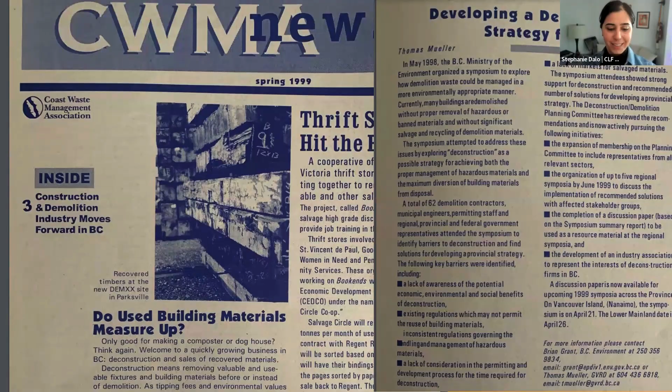Thanks, Sheila. Thanks, Natalie. And thanks to everyone who made the effort to be a part of today's presentation and discussion. Okay, so today we're here to talk about the intersection of embodied carbon and circularity, or in other words, where embodied carbon meets circularity.

Before I get started, I want to take a moment to acknowledge that I live, work, and play on the unceded and ancestral territories of the Squamish, Tsleil-Waututh, and Musqueam First Nations community, who have been stewards of these lands since time immemorial. One thing I want to add is that a lot of these concepts I think really align well with the 7 generations principles and that abundance mindset. I think that we can learn a lot from the Indigenous and First Nations communities.

These themes really mean that we have to shift away from thinking about systems change and social innovation paradigms through a scarcity, urgency, and efficiency mindset, and move toward an abundance and generosity mindset. So I just want to take a moment to say that.

Okay, so for today, I'm going to give you an introduction to the current climate around embodied carbon and circularity principles in the built environment. Then I'm going to break it into three different parts. The first being where embodied carbon and circularity meet. Part two is net zero by 2050, creating the most impact with 25 years to go. And the third being rethinking carbon offsets—a little bit of fun, a short section just to think outside the box.

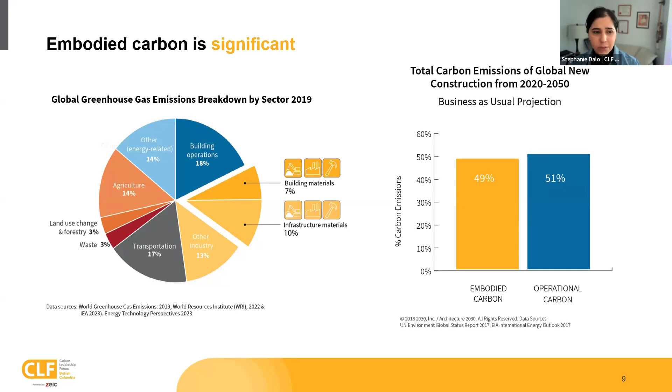Unlike operational carbon emissions, which can be reduced over time with building energy upgrades and the use of renewable energies, embodied carbon emissions are locked in place as soon as a building is built. That means that in the near term, reducing embodied carbon is critical.

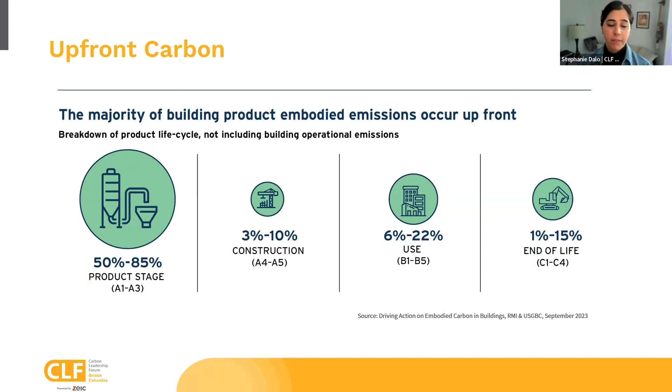Further breaking that down, looking at the whole building life cycle, upfront carbon is emitted before a building is operational and can significantly outweigh operational carbon. The majority of a building's total embodied carbon is released upfront at the product stage at the beginning of the building's life, that's A1 to A3 and including A4 and A5. I'll get more into some of the gaps there later on.

Some tools and strategies to reduce embodied carbon broken out in a report, Embodied Carbon 101, released by the Carbon Leadership Forum last year, include build less and reusing more, designing lighter and smarter, using low carbon alternatives, and procuring lower carbon products. We've been developing clear strategies that can help people better understand the interventions they can make.

Now let's talk about waste. In Canada, the built environment is one of the largest consumers of raw materials and energy, and is also the largest contributor to the waste stream by weight.

3.4 million tons of construction material are sent to landfill annually, representing an estimated 1.8 million metric tons of embodied carbon. I know people like to compare things to vehicles and driving, so I looked into that, and that is the equivalent of over 7.3 billion kilometers driven by an average gasoline-powered passenger vehicle, using the EPA calculator.

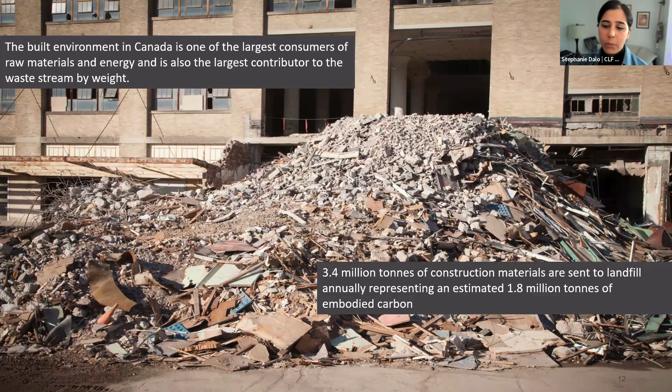Demolition is still heavily practiced because these buildings were not designed for disassembly, making demolition the quicker, more simple, and more convenient option. But typical mechanical demolition is dirty, wasteful, costly, and poses health risks. So we haven't quite figured out how to enable, encourage, and support deconstruction and reuse of materials so that we can drive down product and upfront carbon emissions and reduce waste.

Something I've noticed over the last few years, especially in the last year in conversation, is that it's becoming clear the term circular economy is perceived as just more jargon in the sustainability realm. I want to help people better understand what it means.

A circular economy is one that is restorative by design. It aims to keep products, components, and materials at their highest utility and value at all times. It's a global economic model that decouples economic growth and development from the consumption of finite resources, and focuses on effective design and use of materials to optimize their flow and maintain or increase the stocks of technical and natural resources. A circular economy would provide new opportunities for innovation across fields and establish a framework and building blocks for a resilient system that will work in the longer term.

So what does that look like in the built environment? I'm sure many of you have seen this inverted triangle. What it's meant to do is persuade people to implement strategies that have the highest and most meaningful impact. Sometimes I think we've really started from the bottom, minimizing waste, but this challenges us to think of it from the top down, with these strategies of building nothing, building less, building clever, building efficiently, and then minimizing waste.

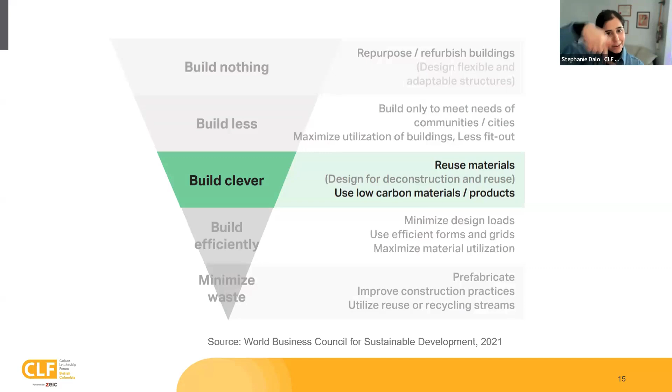The situation we're here with right now is that construction and demolition, as I mentioned, is making up a significant portion of the waste in landfill, roughly about a third of the waste in landfill. And of that waste, it's seen that roughly 37% of that is valuable lumber. That's here in Metro Vancouver, I should say.

A standard home weighs close to 50 tons, and far too often usable resources are discarded at the expense of customers. I know many people who've seen demolition sites and just want to cry. I'm one of those people.

I wanted to show the equivalent of that 43 tons of carbon dioxide to driving an average gasoline powered vehicle over 177,000 kilometers. That's like driving from Vancouver to Ottawa 40 times, which would be 72 days of driving. No thanks, right? That's a lot of emissions.

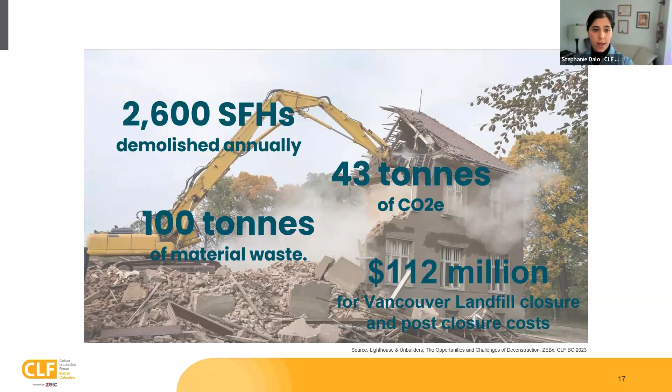That's just looking at 2,600 single family homes that are demolished, producing 100 tons of material waste, which could cost 112 million dollars for Vancouver landfill closures and post-closure costs.

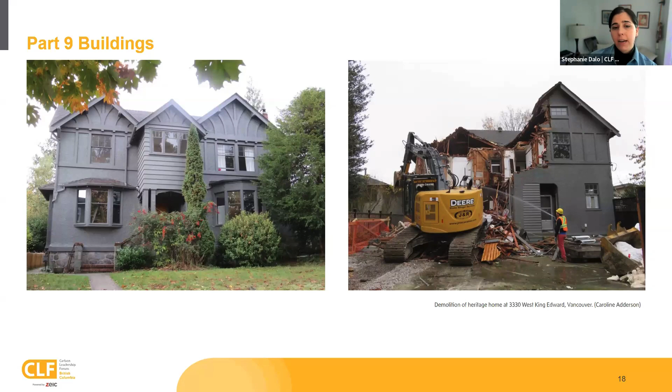We've seen, from an article in 2015, that this heritage house ended up being demolished. Fortunately, since then, we're starting to see the introduction of some deconstruction bylaws.

The City of Vancouver has the Green Demolition Bylaw, where deconstruction requirements apply if you demolish a heritage-listed house, or a house built before 1910. Since then, the District of North Vancouver has released a bylaw requiring deconstruction of homes before 1950, and the City of Victoria released a bylaw requiring deconstruction of houses built before 1960.

There's more detail to each of these bylaws that we can't get into, but they also include salvage, recycling, and diversion rates. It's great to see the introduction of these policies requiring deconstruction.

Although I would hope we can see more of this, and that requirements don't only prioritize homes built 65 years or older, because a lot of newer homes built since then tend to come down sooner when people want larger renovations or retrofits, sometimes lumped in as a big renovation. So what more can we be doing to optimize the reuse of building materials?

Now, when it comes to policy around embodied carbon, the City of Vancouver has been putting a lot of effort into developing embodied carbon requirements being introduced in the Vancouver Building Bylaw 2025 updates. This proposes that all new Part 3 buildings will be required to model and report the whole building life cycle assessment and demonstrate a 10% reduction as specified in the embodied carbon guidelines.

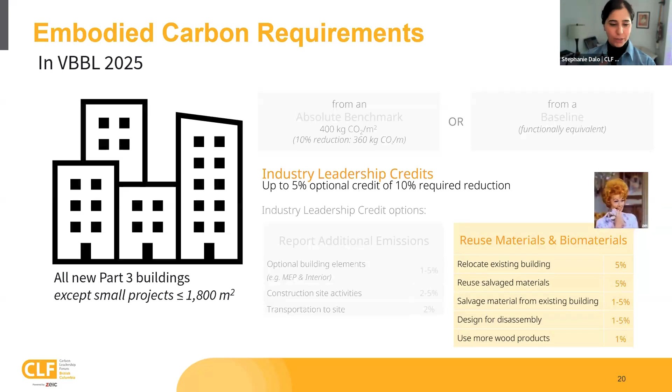So let's get into part one now, where embodied carbon meets circularity. I'm going to give an introduction, or a high-level overview, of these circular strategies, starting with deconstruction and material reuse.

Reuse of existing buildings and/or materials can reduce emissions by as much as 75% compared to demolishing and building new, according to an RMI report on driving action on embodied carbon in buildings. While it might not always be possible to reuse an existing building or a substantial amount of reused materials, the possibility is often never explored early enough in a project cycle. Taking time to establish whether building and/or material reuse is viable can have substantial embodied carbon and cost payback.

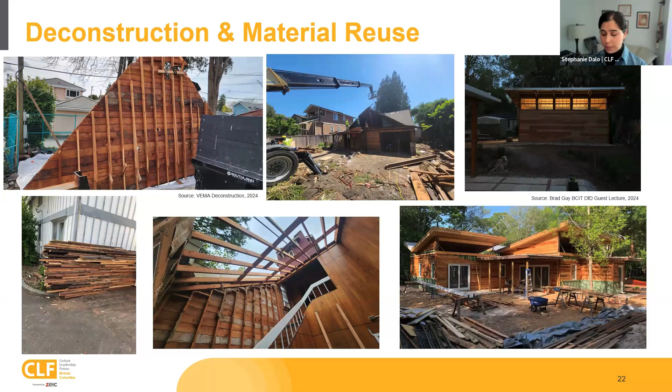Keep in mind that I'm not trying to paper-straw this. I think of the analogy of when we're trying to reduce plastic use and we use a paper straw in a plastic cup, but the straw isn't functional. We're not saying let's use materials that won't perform the way we need them to. I want to talk about the barriers right now to reusing wood, which comes from the need to denail lumber, a timely process that requires space to do it.

If we want to reuse those materials in structural applications, the lumber will need to be regraded. The good news is there are people working to develop tools that can streamline and simplify this process, such as Urban Machine. That's a company that has a machine where if you feed the lumber through it, it can clean and denail it. It's still in early stages of development, but I know they're also working towards having the machine regrade lumber.

They show some really nice photos. When this is a PDF, I've hyperlinked that Urban Machine project inspiration to their lookbook, which shows different applications for how they're reusing lumber. They have some really beautiful applications, and I included interiors because that's really connected to part two of this.

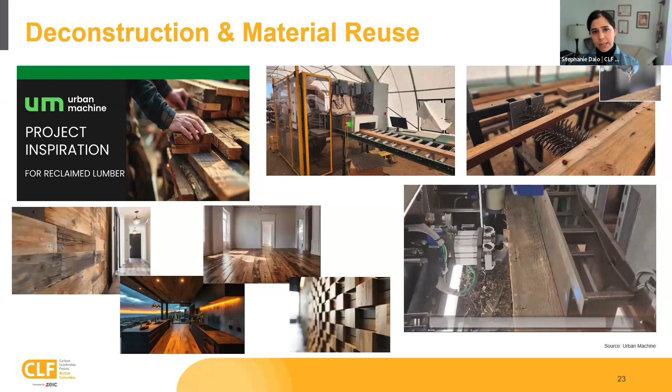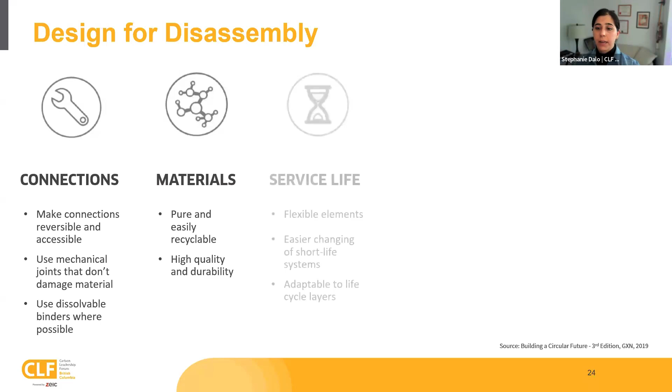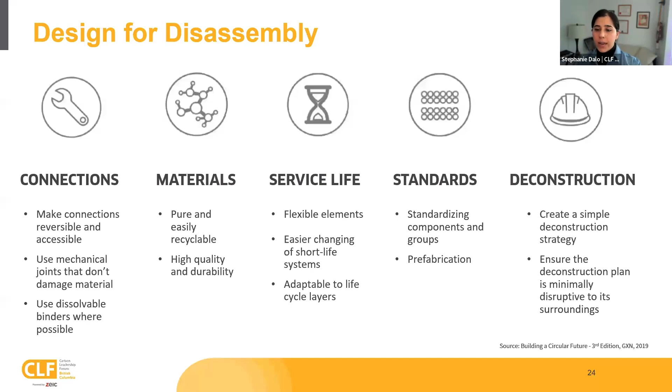The other strategy we're going to talk about today is design for disassembly. This involves choosing reversible connections that tolerate repeatable assembly and disassembly, designing the building with the whole lifetime of the building in mind, choosing materials with properties that ensure they can be reused, designing a simple building that fits into a larger context system—meaning prefabricated or modular systems—as well as creating a plan for construction, design of the building, and deconstruction. That would ideally include developing a material passport for your project.

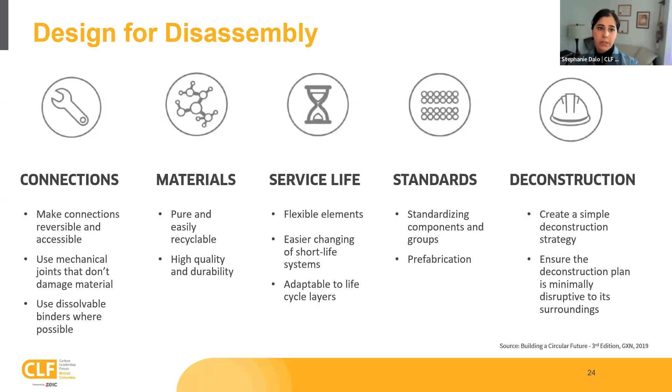Over the lifetime of the building, this could save the owners a considerable amount of money and would really show that we're valuing the materials beyond the building's use.

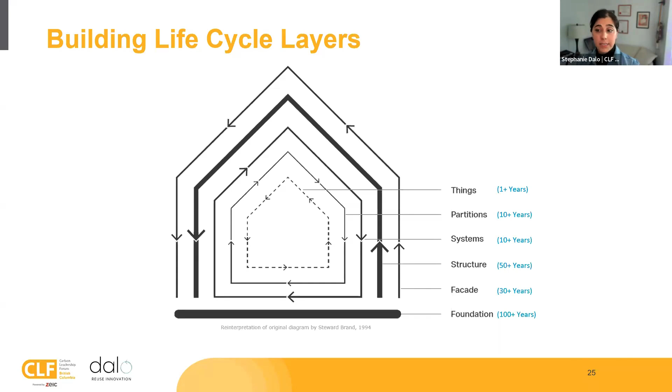It means shifting away from that perspective of linear thinking and realizing reuse potential. This requires a mindset shift, a behavior change, a cultural change, a systems change—we really need to be looking outside just the boundaries of our buildings, as shown here, to end of life, but actually thinking of it more circularly and thinking beyond the building's life, looking at the benefits and loads of that life cycle embodied carbon.

So how does material reuse and design for disassembly impact upfront embodied carbon emissions? Some of you might already be sold on these ideas, but not everyone is, right? And fair enough, people want to see the data. But the gap right now is there's not a lot of data telling us what we need to see to make the business case for this.

So what we need to do is fill that. We need to be looking at how, if we implement deconstruction, reuse, design for disassembly strategies, that impacts the upfront carbon, the embodied carbon, compared to the status quo.

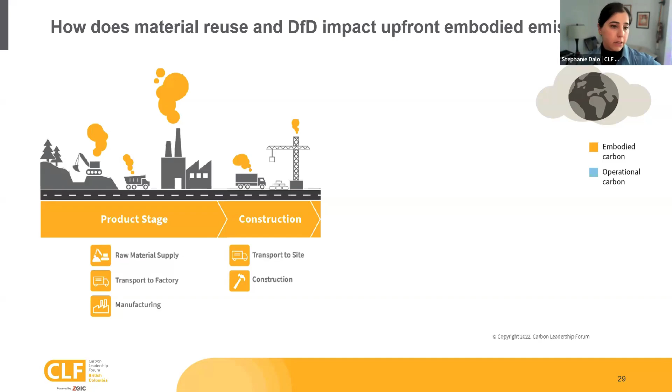When we're reusing existing buildings and materials rather than building new ones, we know that we can significantly reduce embodied carbon. But then how about the use stage? Building renovations generate significantly lower emissions than construction, typically 50 to 75% less than new buildings generate.

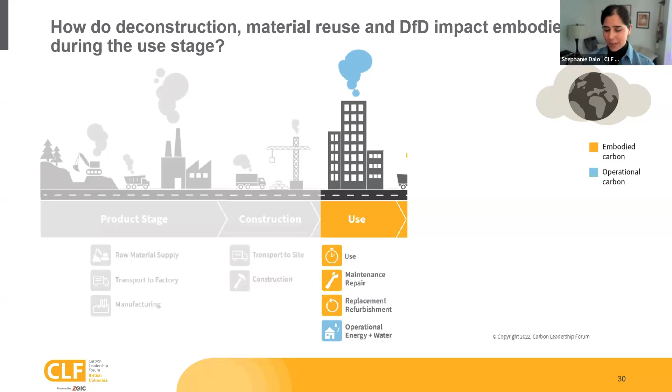So if we think about that, and we think about how we're improving and measuring all of these strategies of making that building adaptable—if there needs to be a repair, it doesn't mean we're going to have to really do too much to disturb the building and waste materials in that process, and be more able to disassemble things in a way to keep most of the materials intact.

And then, of course, to what degree are these strategies going to impact end of life? Right now we consider this stage as end of life, but this mindset shift also needs to happen where we don't think of it as end of life, but rather end of use, because these materials can continue to live on.

So to what degree of embodied carbon could be achieved? I know right now we're focusing on wood a lot because in this region we see a lot of wood in these landfills, as I mentioned.

There have been conversations about biogenic carbon needing to be reported separately, and I think that's very fair—we won't unpack that too much—but I'm wondering if we start to see intentional design in which building designers have done whatever they can within their means to make that end-of-use scenario one of reclaiming and reusing materials. Does that mean we can start to actually consider biogenic carbon, at least in the upfront stages? Is it more meaningful there? So just some thoughts with that.

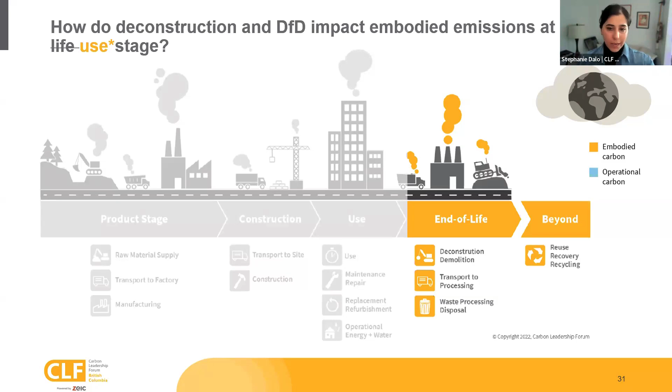Okay, and that would mean that we're looking beyond our life cycle emissions, beyond the end of use. So now for part 2, we have this net zero by 2050 target, and what can we do? We have 25 years left to go. How can we create the most impact there?

So typically when we talk about embodied carbon of a building, we're talking about superstructure and envelope. This is the structure and envelope scope, and it's most often used for LCA submissions. So this is not really giving us the whole picture, but it does explain why a lot of the focus is given to reducing embodied carbon in structure.

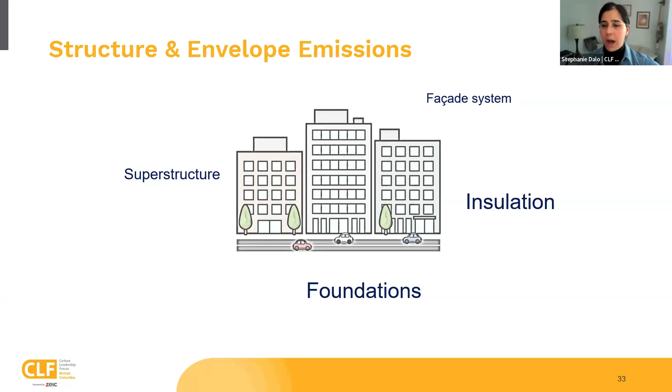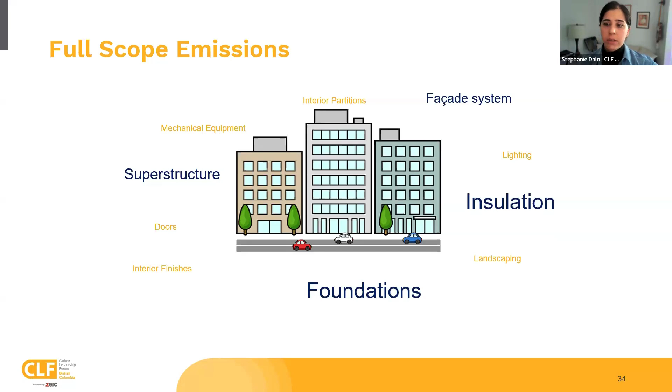But this means that we're currently overlooking the embodied carbon associated with other building components like mechanical equipment, interior partitions, interior finishes, doors, lighting, landscape. If we were to be capturing these items, that would mean we're looking at the full scope of emissions. The reason we don't really include this data is because there's a lack of it. So the more projects that request this via specifications, the more suppliers will get on board with calculating material emissions, or so at least we hope.

But building on that, we still don't know the full scale of carbon emissions from interior materials. We know that the initial upfront impact of new buildings could be up to 370 million tons of carbon dioxide equivalent per year. And I know I'm switching between metric and imperial here, so forgive me for that. But what about interiors?

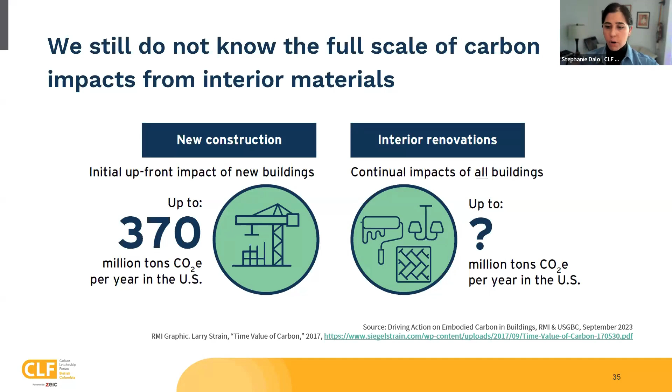So one thing I wanted to say is that we have to continue to prioritize filling these gaps, which would include measuring data and embodied carbon emissions of MEP systems, furniture, finishes, and equipment, novel bio-based materials, materials in interiors. And just a shout out, referencing again the City of Vancouver, we're really hoping that this approach they're taking for the leadership credits will start to incentivize industry to begin capturing and reporting this data.

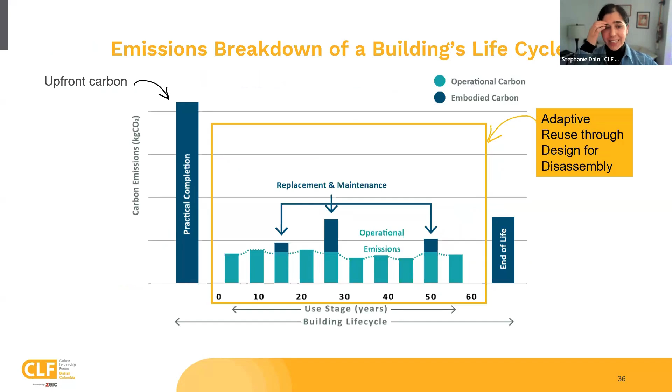So we know a lot of that is upfront, but a question I have is, are we underestimating the embodied carbon emissions related to replacement and maintenance? Because in those stages, we tend to just think of a new project instead of thinking of this existing building's operational emissions.

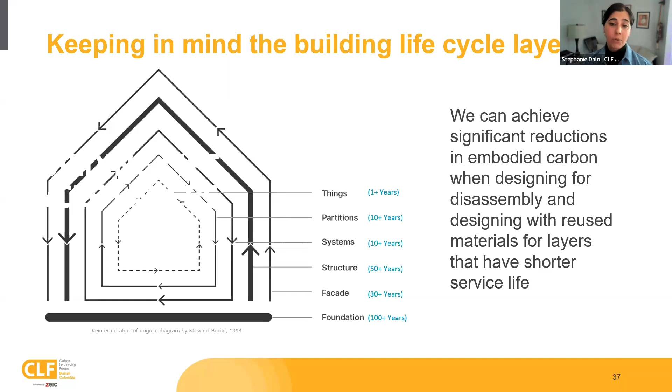And I'm showing these layers because facade, but even systems, partitions, and the things in there have more in that range of where we're going. That 25 years, that's in there. So can we achieve significant reductions if we're designing for disassembly, and if we're designing with reused materials that have a shorter service life?

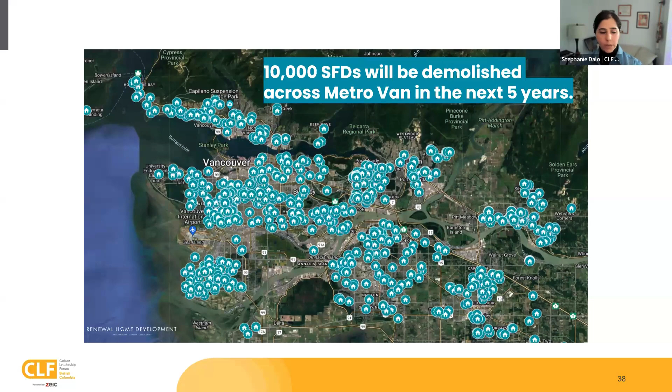And if I'm trying to be conservative and we can only salvage 25% in terms of embodied carbon, that's still over 40 metric tons of carbon dioxide equivalents. So there is so much potential, and this is only looking at single family dwellings. So what if we start capturing those larger buildings that I also showed previously and just try to deconstruct whatever we can? Because one thing I will say is it really gets in our way if we think go big or go home with this. We can still deconstruct some and see what the best we can do.

So for this next section, part 3, rethinking carbon offsets, I want to keep it short and sweet, but I wanted to reference this. This is from the CAGBC's, the Canada Green Building Council's Zero Carbon Building Design and Performance Standards. When new projects are pursuing zero carbon in design and performance, it's a balancing act. They're looking at embodied carbon plus operational carbon minus avoided emissions, and those avoided emissions include exported green power and carbon offsets. Exported green power often comes in the form of renewable energy credits, like purchasing RECs. Carbon offsets usually are achieved by purchasing offsets from projects that actively remove carbon dioxide from the atmosphere, like reforestation initiatives.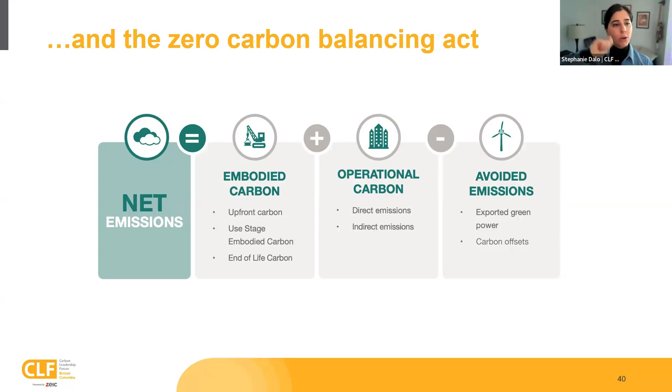Before I move on, I want to say why I show this: it's one of the barriers to getting owners and designers to really opt into applying design for disassembly, or taking the time to find materials to reuse in their projects. They see this as an additional upfront cost to figuring this out. But where I want to push back is to say, if you have a client that's serious about this and is actually pursuing the performance standard, they're also having to put some capital into purchasing the offsets.

But there's a lot to be said about carbon offsets, and we can't really get into this too much—this is a whole webinar of its own. But there's a lot of criticism around the legitimacy of them. It's constantly being challenged and under scrutiny, which I think is fair. Some critics will claim that the whole thing does not really have any real bearing on the health of the planet, or, let me try to be gentle with how I phrase this, carbon sequestration offset projects are the least effective. Defined as the long-term storage of carbon in plants, soils, geologic formations, and the oceans, realized through activities including afforestation, reforestation, improved forestry, improved agricultural practices, and revegetation.

So for every 1 ton of carbon that is emitted, we would need 1 ton of carbon that is sequestered, which would result in net zero emissions. But one of the most popular carbon offset projects involves planting trees. That could fall under afforestation, if it's a new area that didn't previously have trees, or reforestation, if it's an area with trees already, planting there. People say it's a simple action to take and one of the most well-known ways to protect our environment. However, what some critics will say is it's not an effective way to reduce emissions in the long term.

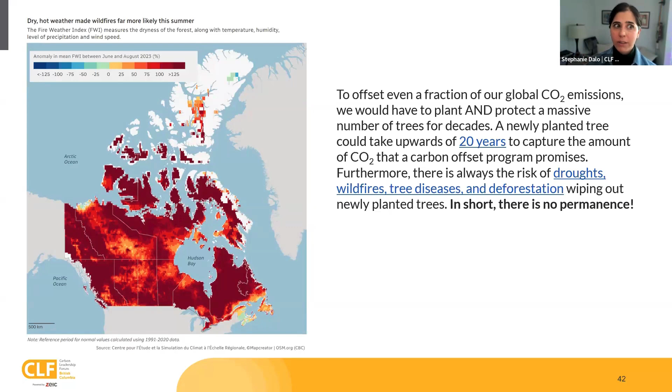So this is out-of-box thinking I'd like to have fun playing around with. What if we created a model similar to renewable energy credits? We could call it something like material reuse credits, for projects that did their best to implement embodied carbon reduction strategies but still have a balance to offset. Maybe they are funding the infrastructure that can enable deconstruction and reuse, which in large part is the storage piece. Right now, that whole piece of denailing, sorting, and inventorying, you can't really do on your site. We're really limited in space. That takes time, that takes effort. So storage is a big gap here, and we need to find a way to support that.

So this has the potential to simultaneously incentivize people to design for disassembly, as they might see that there's a future for those materials and they will still hold their value, as deconstruction will be more feasible and supported. Right now, people don't see deconstruction as cost effective. But my question is, can we redirect funding that is still going towards fossil fuels and redirect that towards subsidizing material recapture and sustainable, equitable, and resilient urban mining? And start really thinking about that circular economy principle as products as a service, or in this case, buildings as a service.

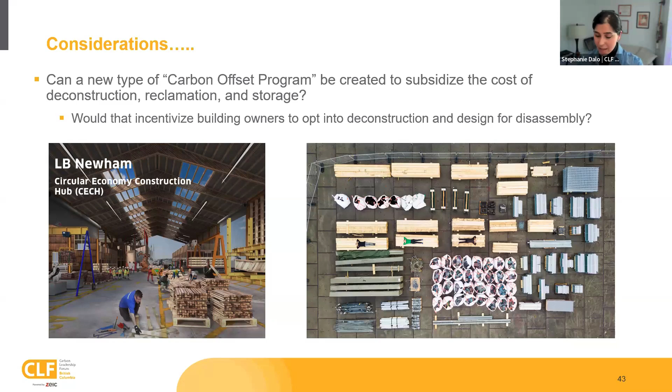For my final takeaways and reflections, I want to just acknowledge and thank you if you made it this far, because I know this presentation has this energy, or I have this energy, I should say. But to recap, today we talked about the interrelationship between embodied carbon and circularity. I highlighted these four points, but the focus for today really zeroed in on build less, reuse more, design lighter, and smarter.

And we discussed the time value of carbon and how deconstruction, reuse, and design for disassembly, if implemented and captured in the emissions reductions of interior finishes, could help us achieve greater embodied carbon reductions. And we wrapped up with some fun out-of-the-box thinking when it came to carbon offsets.

But here are a few more reflections to take with you after today: how can we continue to align the Part 3 and Part 9 embodied carbon and deconstruction policies? Can we create bylaw that requires design for disassembly? Can deconstruction of existing buildings and design for disassembly of new buildings be advanced at the same time?

And a little bonus reflection here is, if a cradle-to-cradle or a circular building standard was created, applied, and achieved, could upfront biogenic carbon sequestration be included in whole building life cycle assessment?

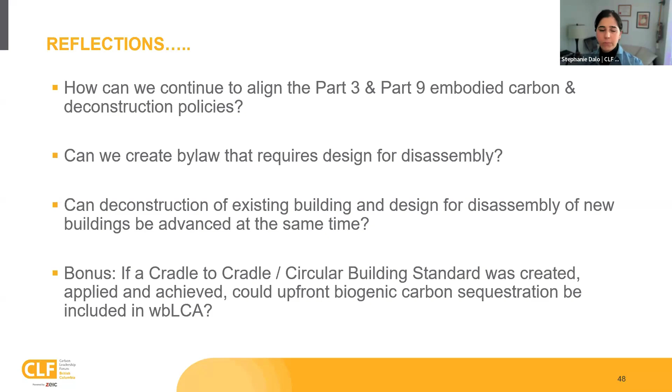I want to also just tie this back to why does this all matter? Like, why are we even here talking about this? And it's because embodied carbon is directly linked to public health and equity.

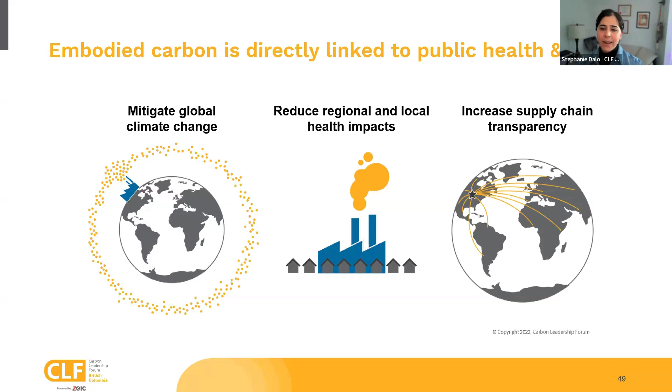And a circular economy aims to move away from an extractive economy to a sustainable and regenerative economy. And the principles of a just transition and the work of climate justice movements reinforce the idea that addressing climate change and equity cannot be done in isolation. The transition to a low carbon future itself must be equitable and create space to focus on new structures of power and accountability. And embodied carbon is inherently connected to climate justice and issues of public health and equity.

I think I said that, but I'll say it again. And the topic of embodied carbon, for some of you who are maybe new in this space, it can seem highly technical, but project teams can get started by pursuing interventions and implementing these intuitive circular strategies to reduce embodied carbon.

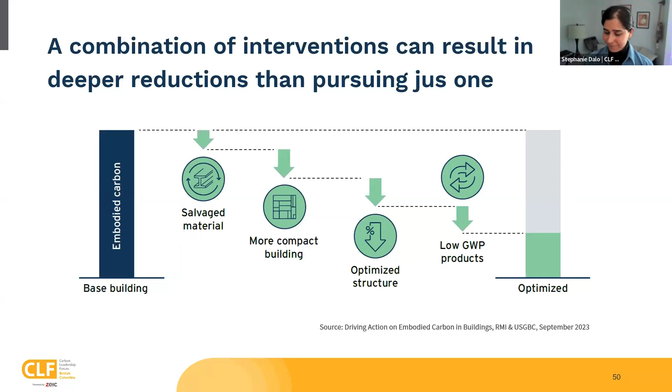But these strategies are not mutually exclusive, and a combination of interventions can result in deeper reductions than pursuing just one. The last thing I'll say is we'll have more decarb lunches that go beyond just the theme of circularity. But the next circularity themed one, I'm pleased to share, will be delivered by Lighthouse.

So by Shiji and Adrienne at Lighthouse, they're going to talk to you about life cycle assessment of relocated and retrofitted homes. And in that presentation, they will highlight the environmental impacts of demolition in Metro Vancouver, and they will advocate for home relocation and deconstruction as sustainable alternatives to reduce embodied carbon, material waste, and landfill impact.

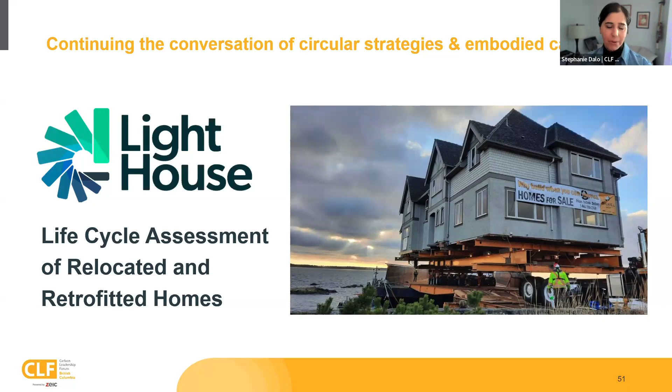So I know that this presentation, we didn't really get into the numbers, but for theirs, you'll start to see some of that embodied carbon data.

I want to thank you all, and I just want to thank all of this information. Sheila mentioned at the start that people have been talking about this since, what, the 92 or somewhere in the 90s, okay, when high-rise jeans were still acceptable, or low rise, I mean, were acceptable. High rise, let's bring that back. But anyways, I just want to say that the build reuse community has been a really big support, and I've gotten a lot of information from them.

I'm also, the Structural Engineering Institute has the Circular Economy Working Group, and so, just a lot of great leadership. I wish I had like a rolling credits of people I want to thank for all of the work that you're doing in this space.

And I think a lot of this is being in the right time and right place, and we have the momentum and we have the answers. Like, data is important, but we know what we need to do. We don't really need to keep spending all the time doing that, but I understand that for some people, the storytelling includes the data, and so it's a part of this.